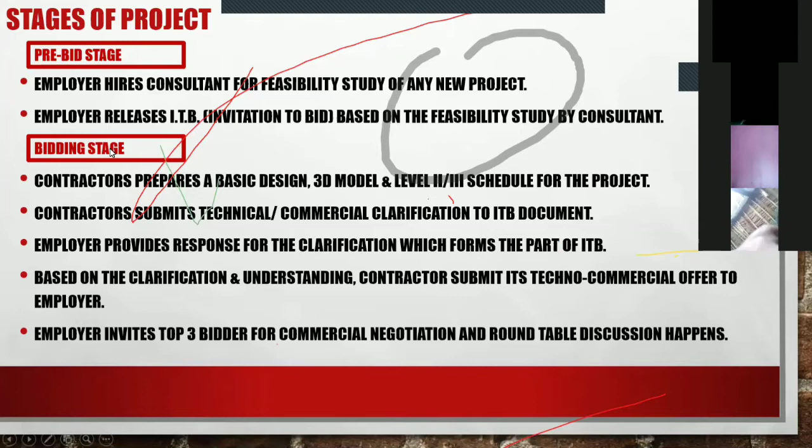So first is the pre-bid stage, then the bidding stage, then comes the award stage. Once everything is clear, both contract teams work together and the award of the contract is given to the successful bidder. Generally, a kickoff meeting happens between the employer, consultant, and contractor to know each other and understand the scope of work.

After the award stage, the next stage is the engineering stage. In engineering, we divide the complete project into three parts: 30% engineering, 60% engineering, and 90% engineering.

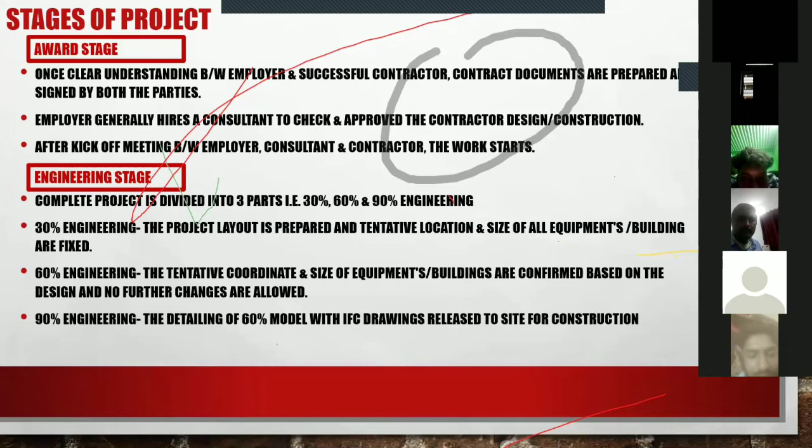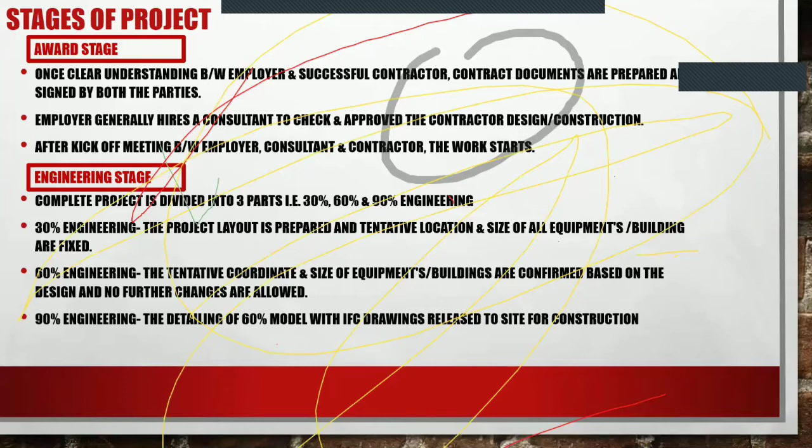So in 30% engineering, let me be honest with all of you, these are things you will get to know once you are into the job. I'm sharing this information from my own experience, because these things were not shared with me either.

So moving ahead, the engineering stage is divided into three parts. In 30%, we have the tentative layout of the project, and the size of all the equipment and buildings are fixed. That is what we call 30% engineering.

Once the tentative layout is fixed, we prepare the 60% model. Then comes the 90% model, where IFC drawings are released to site. IFC, for construction, is released to site so they can proceed with that 90% engineering work. That is the engineering stage.

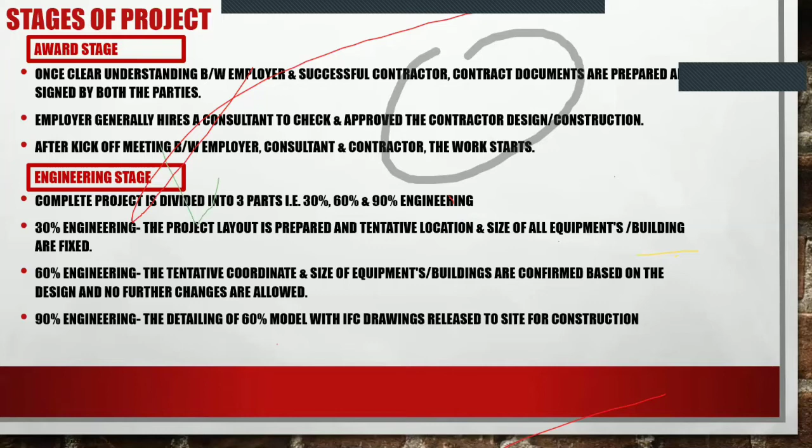Now in the procurement stage, based on the 30% engineering, we float the inquiry, that is RFQ, request for quotation. We float the inquiry in the market and get offers from vendors or subcontractors. Once the offer is received, offer evaluation and technical discussion starts.

Based on the 60% engineering, another round of discussion clarifies and resolves any technical or commercial issues. The successful bidder goes through commercial negotiation, and the package is suitably awarded. That is the procurement stage.

Now in the construction stage, during the 30% engineering, since construction cannot start, we review the drawing. The construction team, along with the project director, project manager, construction manager, site planner, and other key assigned persons, reviews the drawing, and a discussion with the engineering team happens to review constructability.

I'll share something here. In engineering or drawing, we follow standard codes, but at site, when we execute the job, there's a different code and part to execute. So construction is not always a friendly part, and as a result it becomes very difficult for everyone to execute. There are challenges in construction, which I'll come to later.

To resolve that, even in the initial stage, we start discussing with our engineering coordinators about how a particular material needs to be constructed. We feel construction can be done where welding is less and accessibility is better. Taking all that into consideration, a discussion happens, and engineering follows our concerns where required, designing the structure accordingly. That is one part of what we do.

Level 1 means your father is there. If someone asks his introduction, he will say he is your father. That is level 1. Level 2 will be there, his father and your mother are there. Your mother is there. That is level 2.

Level 3 means your father, your mother, yourself, and any siblings. So that is level 3. And level 4 will be when your children, or some future part, is there. That is level 4. So in this way, the detailing is there.

So if I have to do in level 1, I can say the building starts to be constructed, like foundation will be there, column will be there, beam will be there, slab will be there. That is my level 1.

Level 2 will be there. I will see when the columns can be casted, when the slab can be casted, when the beams can be casted, and what resources I will require.

Level 3 means I will include manpower, machinery, and material. Triple M, that we call MMM. Manpower, material, and machinery, so those three will be included.

Then we prepare L4, giving a detailed schedule based on the IFC drawing. We understand what needs to be done to give the client a better view, because the client, or the employer, or the consultant, will be asking you for the L4 schedule. They won't be restrained to L3. L3 will be only for that.

So we prepare and then we submit to the client. That is the construction stage.

After that, we plan for the mobilization of staff and workmen. Sometimes when we are doing an overseas project, like in Saudi Arabia, we discuss with the government of the Kingdom of Saudi Arabia about what resources we require for visa purposes, because we need the visa quota also to mobilize staff from India. This is also taken into account, and construction of the project suitably starts once we receive the 90%.

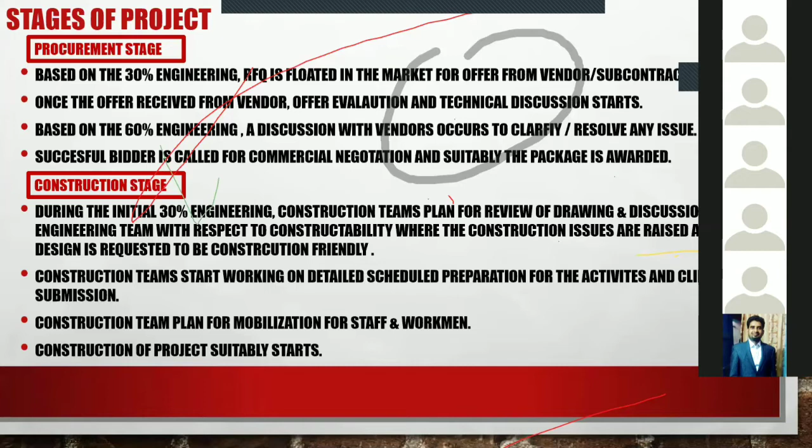After the project is completed, the next phase is the commissioning stage. There are many equipments which are being supplied by a vendor, for example Sandvik. These are the major equipment suppliers.

They come to site, charge up the equipment, and from a commissioning point of view, they train the employer's staff. One month of training is given to all the employer staff to know how the plant will be running, what small items they need to take care of, what the alarms are, what the risks are, and when a certain PLC shows an alarm, what the reason is.

The vendor explains these kinds of things to the employer, and then the employer does a 10 to 20 day trial run where the vendor just sits and watches the plant. Once the client is happy and confident of doing the job, there's a complete handover. So once the project is completed, the commissioning stage is completed.

In the contract, there is a stage called the defect liability stage. Now, defect liability is similar to an equipment warranty.

For example, if you go to the market and buy an AC or a washing machine from Samsung or LG, they give you a one year warranty or guarantee that if any defect happens, they will come and repair it, or replace it, free of cost.

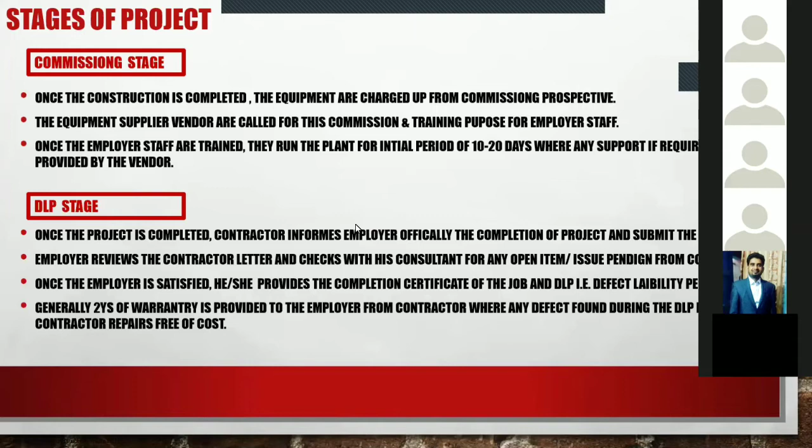Now, moving to construction. Everywhere you might have heard in the past that there are many things in construction, so BIM - I'm not sure if any one of you have heard of BIM.

Hello? Yes, sir. Any one of you have heard of BIM? Yes, sir. BIM, great.

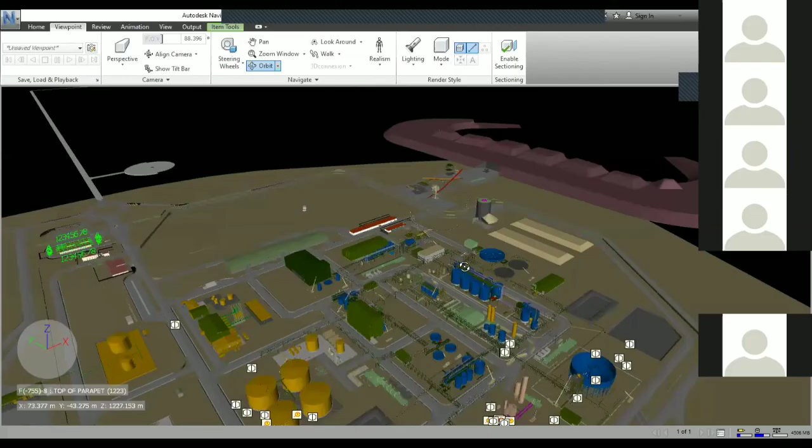Please keep it to yourself, we are not allowed to share. So if you can see my screen, this is the project I was saying I am executing right now in Saudi Arabia - this particular Mansoura Masara gold project, which we are performing.

So if you can see this particular structure, this is all a 3D model basically, which helps us to understand. Basically, we are doing the 3D in AVEVA software.

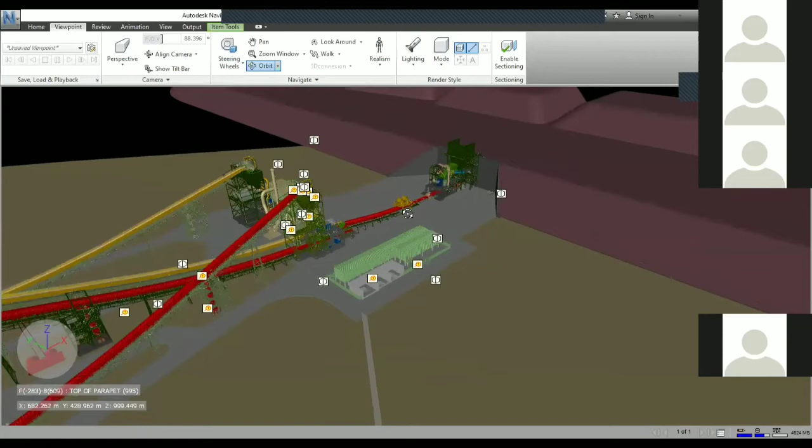Now from AVEVA, since everyone is not acquainted with AVEVA, what we did is export the model and use it in Navisworks. Navisworks is user friendly and is easily installed as software on your laptop also, and anyone can view the project.

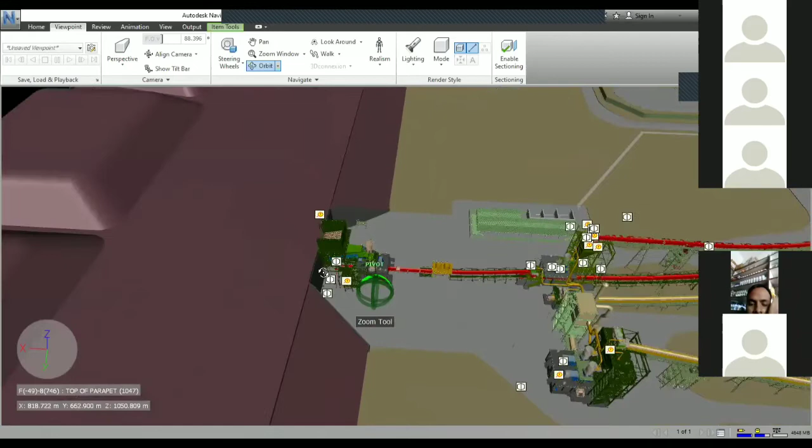So this is the plant, or the 3D plant which we are constructing. Right now the detail engineering is going on, we are at 60% review, which I explained to you. This particular part is called run of mine, that is ROM. And we have a retaining wall of 100-meter length, which is being cast right now.

So Amit, can you see the screen? Yes, we can see the screen.

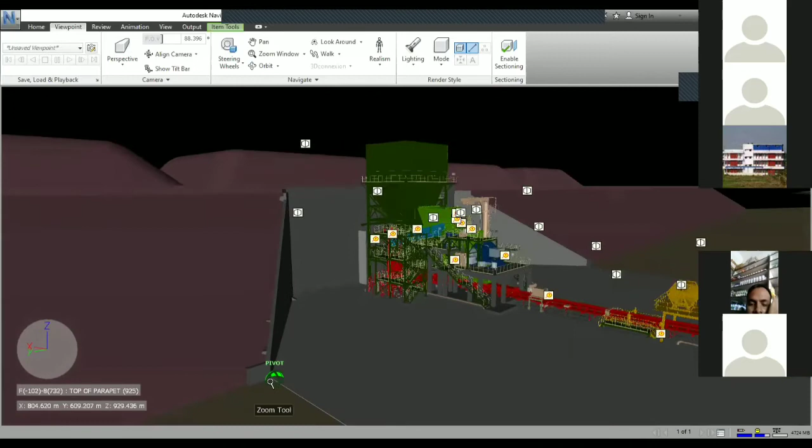Okay, that's good. So this is the 3D or the primary crushing area which we have. What happens is it gives a clear picture of how the foundation will be. If you can see the foundation, how the combined footing will be, how the raft will be, then we have some combined footings for the pedestals. All things are clearly visible - inward beams are there, then you have the counterfort.

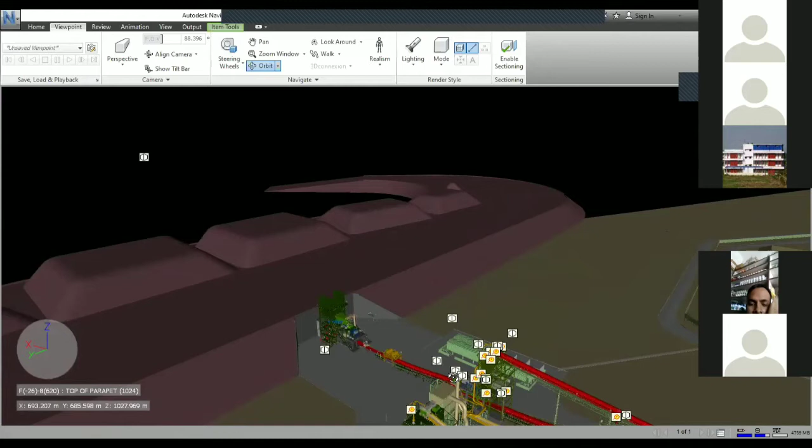So many different structures - understanding of how the process will go on, what needs to be constructed at the first stage, and what we have to construct next. So your construction stage, or construction scheme, also gets clarified to everyone, because now everyone is seeing the 3D model, and 3D is easy to understand for everyone. So it gives a clear picture of what the model will be and what the process plant will be.

So this is one of the things which we are using. Secondly, I'll just go to my slide.

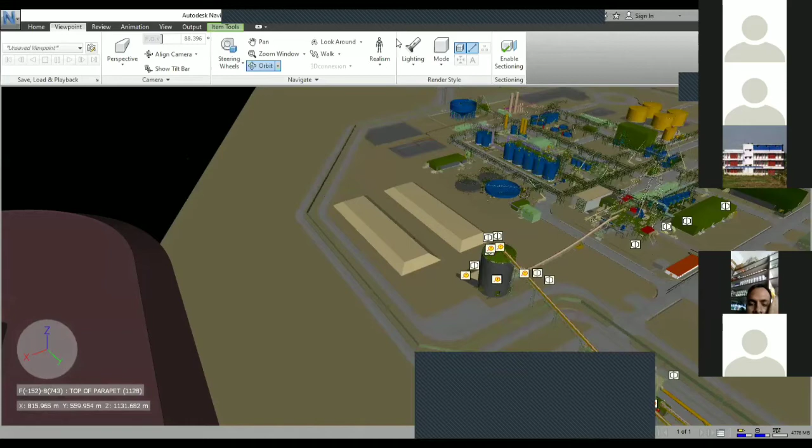So this is the smart modeling which we are using. Secondly is the 4D planning.

Now 4D planning means nothing, it is just the 3D model you might have heard, plus your level or your schedule. When both are synchronized, it is called 4D. And when your 3D model plus your schedule plus your costing, whatever cost you are having, when you include all this, then it is called 5D planning. So 4D planning we are doing here.

I will just show you one particular structure which I am working on. Can you see my screen? Yes sir, this is what the 4D modeling is there.

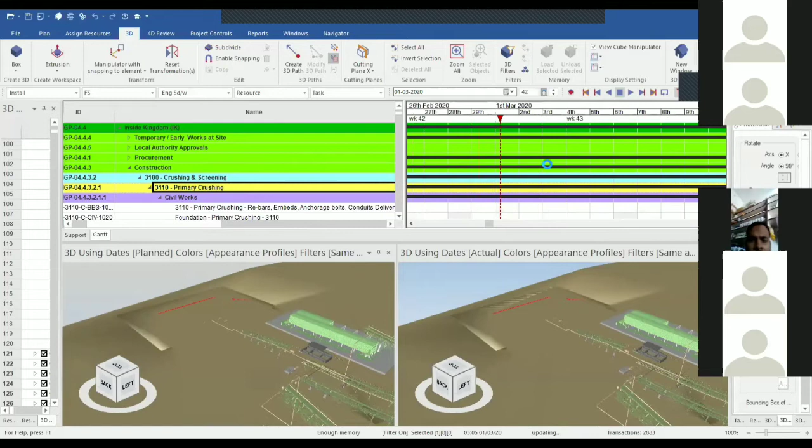So this is one of the job roles which you will be subjected to assign or perform when you are in the company or the corporate world. So here it is a schedule, this is the complete schedule which we have. On the right hand side, this is called the Gantt chart. Gantt chart means it will show the activity, what are the activities by the month and the day when you scroll down. The red line, I'm not sure if everyone can see on mobile or not, but this is called focus time. When I move the focus time, it will show what construction is happening.

On the left hand side, if you can see my window, we are modeling the same model which I have shown to you, that ROM pad or the retaining wall. We are doing construction of that one. So that is 3D using plan date. Whatever baseline we have, this particular window will show how the baseline should go. On the right hand side, this is as per the actual, the actual requirement of what we have executed at site.

So just let me play an animation for you. Just be patient and we'll see what is being done. So just keep a focus on these two windows.

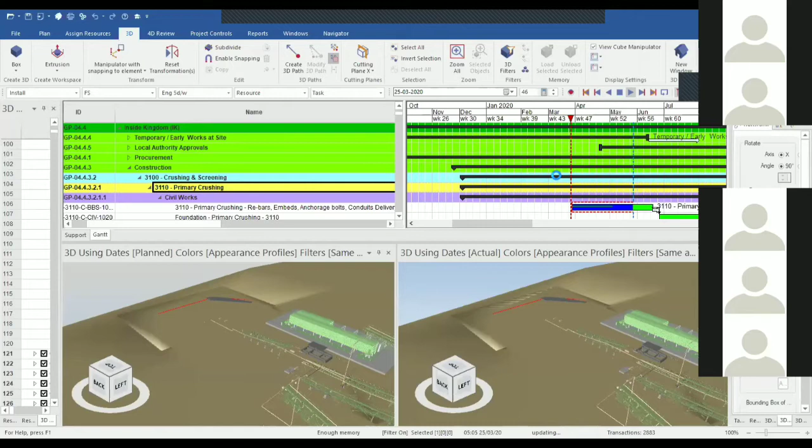Can you see my screen? Yes sir, yes sir. So if you can see on the right hand side and the left hand side, the casting of the counter for the raft foundation is going on. Plan versus actual is okay. I will stop in the month of May because that is our data date, so you will see what things are being casted or performed.

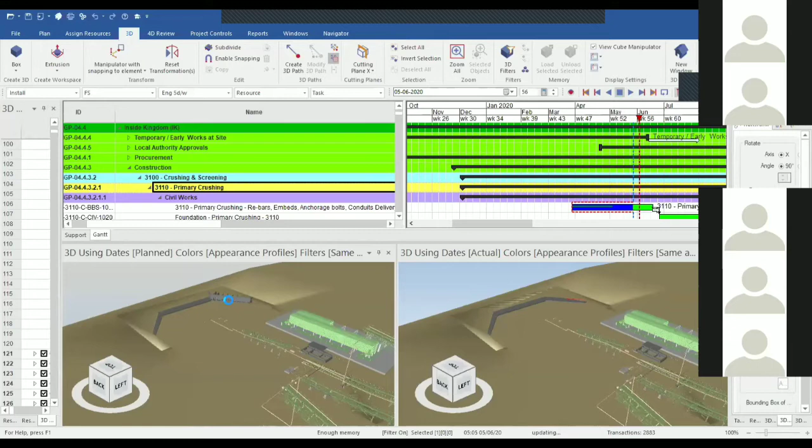So just let me explain. On the left hand side, if you can see, I'll just zoom in. So as per the schedule, it says that the casting of the south wing wall has to be done on 30th of May. But in actual, on the right hand side, it is not casted.

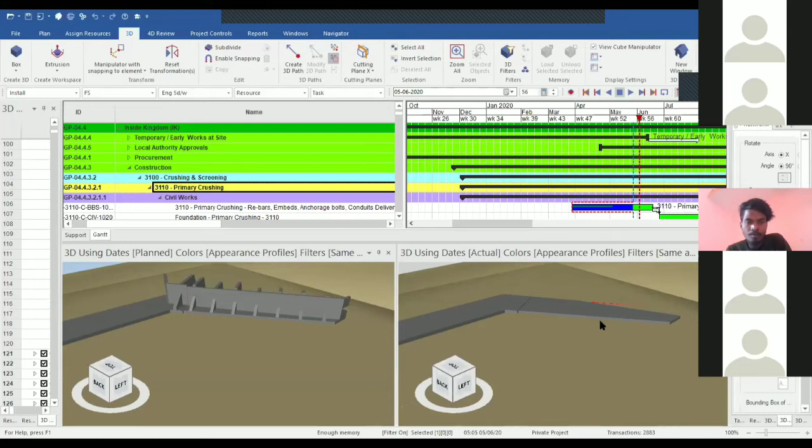The reason is, as we all know, throughout the globe the COVID-19 is there and we are not able to cope up with that. And since it is affecting construction, our site is also not working to avoid any contamination of this particular novel COVID. So once the construction is regaining or restarting, we will be getting the date. So in this way, we are monitoring the 3D or the 4D part.

So this is what we are doing with the 4D planning with Synchro. And one part is BIM 360, that is one of the software which we are using in iPads. We have been given some iPads from the company. Now in this iPad we load this BIM 360 app, and then we give this access to all our construction managers and engineers.

Now in the model itself, no one has to carry the drawing anymore. The biggest problem and challenge is for the site to have the drawing. And the second biggest problem is, after having the drawing, you don't know what structure is coming next. To cope with that drawback, we have made this BIM 360 where we give the iPad to all construction engineers. They will go with the iPad, they have the model, they can review everything, and they can find the observation of what has to be done, and suitably it gets uploaded to the cloud.

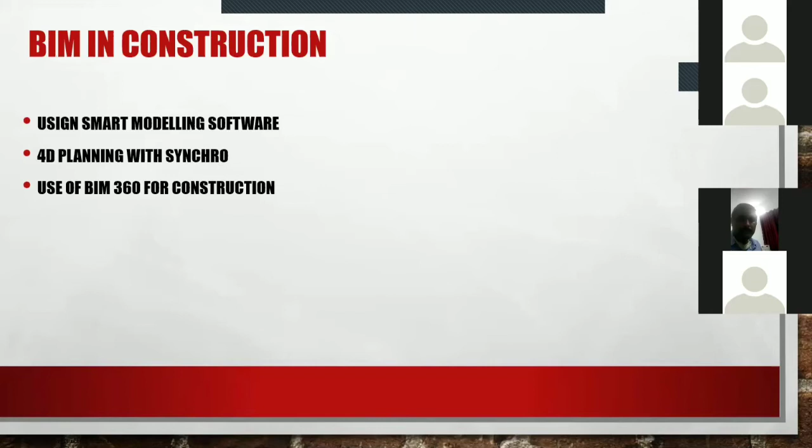The cloud means a server where the data will be uploaded. If this particular engineer has raised a concern on the construction of this structure, our engineering office will get a notification that this particular issue is created, and they will address that issue. So this is what we are doing in BIM 360.

Now, what are the challenges? This is, I think, the topic which Mr. Amit has explained to us, but I have to go through all those parts to make you understand what are the challenges that will be coming.

Because challenges are there when you work. When we don't have work, we don't have challenges. So the first challenge we face is the local issues.

What I mean by local - in the news about 2 years back, you might have heard of a location near Chennai called Tuticorin. There was a project called Vedanta copper plant, and we were doing the construction of that. But due to some environmental issue, the locals explained to the government the harm being caused. The government and the Supreme Court put a stay order on the construction, and that job is now closed. We had done the bidding, we were at a very advanced stage of engineering, but everything went to crap. Nothing can be done. So that is one of the issues we face.

Similarly, another Vedanta project in Rajasthan - the client had a deal with local persons to give them employment but didn't provide the jobs. So the locals mobilized and came to our site. Our security was there, but when people come in a group of 1,000 or 2,000, you cannot handle everyone. We had to request the government to interfere, and at that stage Vedanta had to give them jobs. The project got delayed because every day the site would have to be closed due to the local issues. This is one kind of challenge we face.